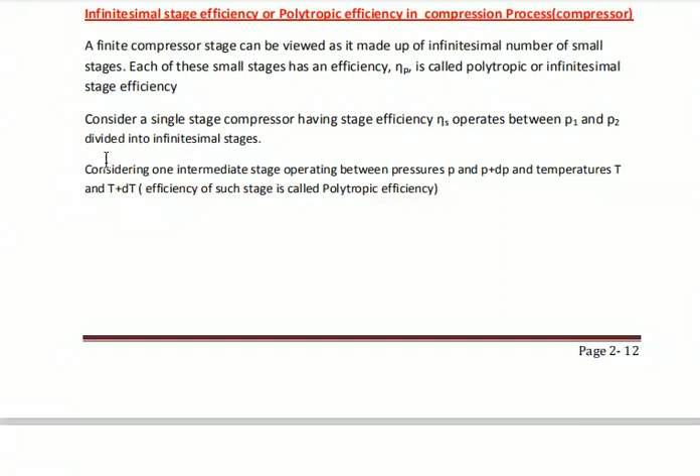So you take one single stage compressor, which can be divided into a number of small stages, which we call infinitesimal stages. That single stage compressor has pressures P1 and P2. In between P1 and P2 we divide it into small stages with pressures P and P plus dP, and temperatures T and T plus dT. This is called the polytropic efficiency.

For this we take the temperature versus entropy diagram. Here we take our single stage, 1 to 2. It is just one stage, a single stage compressor, operating between the pressures P1 and P2.

Again, this single stage compressor can be divided into a number of small infinitesimal stages. Out of those, we take one stage operating between the pressures P and P plus dP, and the temperatures T and T plus dT. This shows the compressor temperature versus entropy diagram.

First, we know that the polytropic efficiency is equal to the isentropic temperature rise divided by the actual temperature rise. So what is the isentropic temperature rise here? This dTs is the isentropic temperature rise, and from this point to this point, dT, is the actual temperature rise. That gives us the polytropic efficiency.

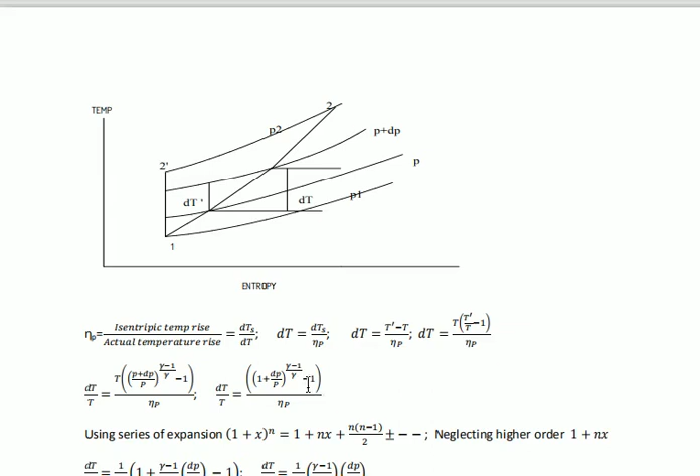So next, dT/T is equal to (1 + dp/p). p/p becomes 1; we just have to separate these two terms, p/p plus dp/p. p/p is nothing but 1, so (1 + dp/p) raised to (gamma minus 1)/gamma, minus 1, divided by eta p. For these equations we have to use the series expansion, which is used in mathematics.

Using the series expansion, (1 + x) raised to n gives us 1 plus nx plus n(n minus 1)/2 x squared and so on, and neglecting the higher orders, 1 plus nx. If you apply this series expansion to the above equation for dT/T, consider this x, so this becomes our n. Here 1 plus, and this minus 1 plus 1 will be cancelled, so directly I can write nx.

In place of n we have (gamma minus 1)/gamma. For (1 + x) raised to n, dp/p is nothing but x, and (gamma minus 1)/gamma is nothing but n. So we substitute all of them. This one and this one get cancelled, so we take n equal to (gamma minus 1)/gamma.

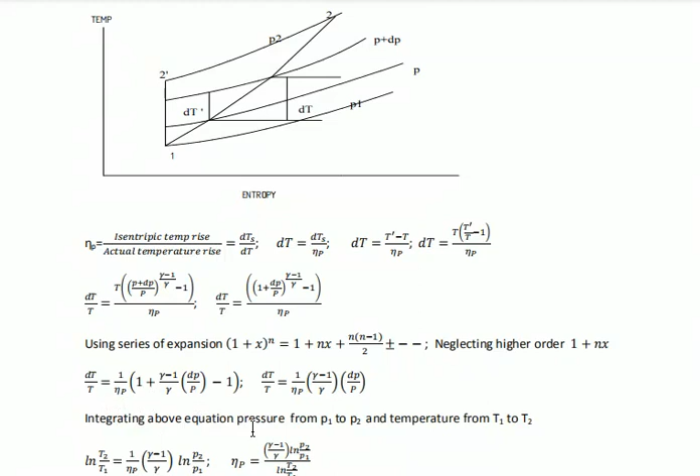Now integrating the above equation, pressure from P1 to P2 and temperature from T1 to T2. If you integrate dT/T, it becomes ln(T2/T1) is equal to 1/eta p times (gamma minus 1)/gamma ln(P2/P1). So eta p, the polytropic efficiency, can also be written as eta p equals (gamma minus 1)/gamma ln(P2/P1)...

...divided by ln(T2/T1); we just take this term to the other side. Also we can write ln(T2/T1) is equal to 1/eta p times (gamma minus 1)/gamma ln(P2/P1). So ln(T2/T1) equals ln(P2/P1) raised to the term above, that is 1/eta p times (gamma minus 1)/gamma.

The ln gets cancelled. So T2/T1 is equal to (P2/P1) raised to 1/eta p into (gamma minus 1)/gamma. This is equation number 1. Now assume the irreversible adiabatic compression process 1 to 2 as an equivalent process with an index of compression n.

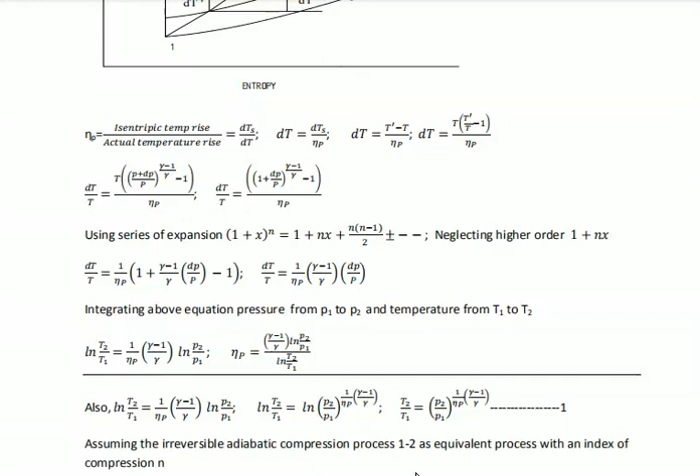Index of the compression here: if instead of this gamma you take the index of compression, that is represented with n. You just have to write that T2 by T1 is equal to P2 by P1 raised to n minus 1 by n. So this is equation number 2.

So comparing equation number 1 and 2, we got that 1 by eta p into gamma minus 1 by gamma is equal to n minus 1 by n. So T2 by T1 is there, P2 by P1 is there. Here also T2 by T1, P2 by P1 is there. We just have to compare these two indexes. We get that 1 by eta p into gamma minus 1 by gamma is equal to n minus 1 by n.

So eta p is equal to gamma minus 1 by gamma into bracket n divided by n minus 1. So hence there are two formulas to find out the polytropic efficiency for the compression process. These equations are very important to find out the polytropic efficiency of the compression. The first formula we can use is in terms of pressure and temperature.

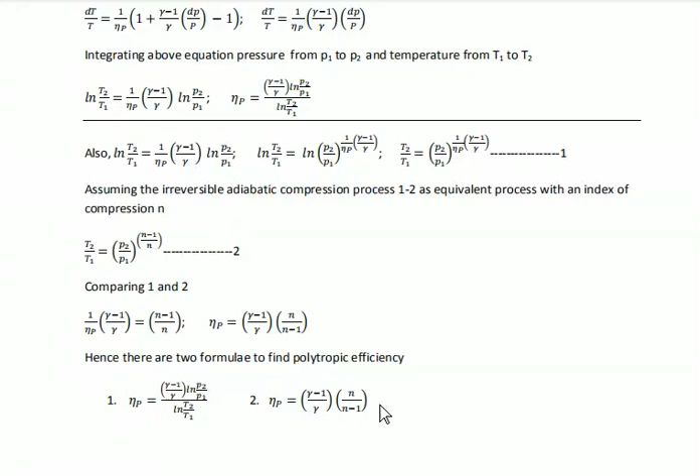So if he has not given the compression index, which is represented with n, then we have to use the pressure and temperature terms. That is given by eta p is equal to gamma minus 1 by gamma into ln of P2 by P1 divided by ln of T2 by T1. Similarly for the second, eta p is equal to gamma minus 1 by gamma into bracket n divided by n minus 1. So these two formulas are used to find out the polytropic efficiency for the compression process. Okay.

Similarly for infinitesimal stage efficiency or polytropic efficiency in the expansion process that takes place in the turbine. A finite turbine stage can be viewed as made up of an infinitesimal number of small stages. One stage of the turbine can be divided into a number of small stages. Each of these small stages has an efficiency eta p, called the polytropic or infinitesimal stage efficiency.

Next consider a single stage turbine having the stage efficiency eta s, operating between the pressures P1 and P2, divided into infinitesimal stages. So that stage is operating between the pressures P1 and P2. In between these two pressures, we have taken one small stage operating between the pressures P and P minus dP, and temperatures T and T plus dT.

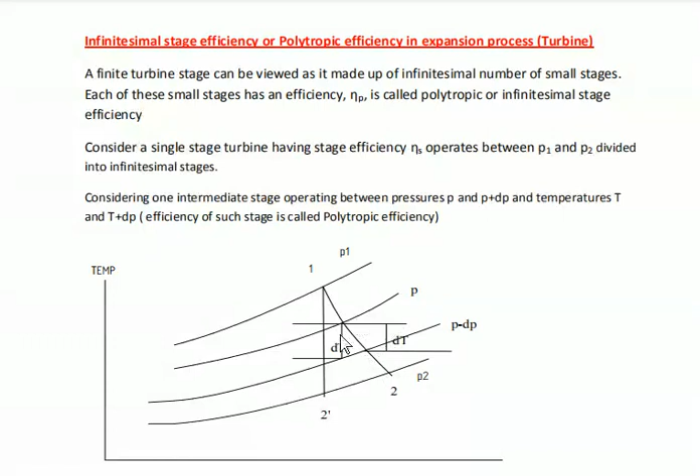So the efficiency of such a stage is called the polytropic efficiency. The stage is in between the pressures P1 and P2, and we take another small stage operating between the pressures P and P plus dP, T and T plus dT. That stage efficiency is called the polytropic efficiency. That is shown on the temperature versus entropy diagram.

So polytropic efficiency can be written as actual temperature drop divided by isentropic temperature drop, that is dT by dTs. So dT is equal to eta p into dTs. And dTs can be written as T minus Ts, the difference between the actual temperature and the isentropic temperature. So dT is equal to eta p T into, taking T outside, 1 minus Ts by T.

Taking this T to this side, it becomes dT by T is equal to eta p into 1 minus. Writing this temperature ratio in terms of the pressure ratio, we get P minus dP by P raised to gamma minus 1 by gamma, bracket complete. So dT by T is equal to eta p into 1 minus bracket P by P minus dP by P; P by P is nothing but 1, so 1 minus dP by P raised to gamma minus 1 by gamma, bracket complete. Here you just have to separate these two terms to get this term.

Again using the series expansion, (1 minus x) raised to n is equal to 1 minus nx plus n into (n minus 1) by 2 factorial into x square, minus n into (n minus 1) into (n minus 2) divided by 3 factorial. So we have to apply these equations to the above equation for dT by T.

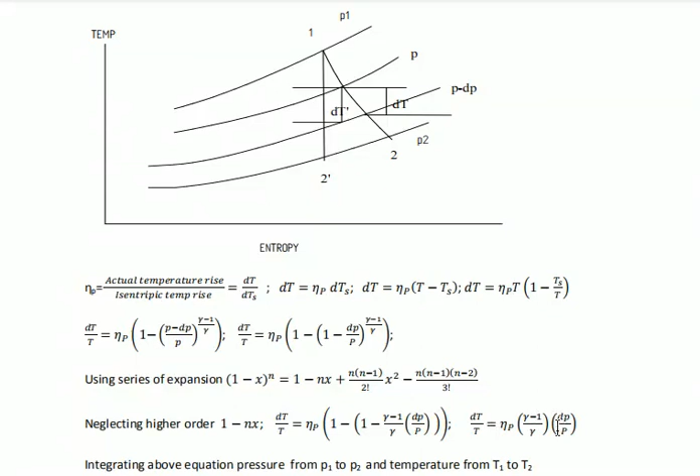This one is as it is, minus, it becomes 1 minus nx. n is nothing but gamma minus 1 by gamma, and x is nothing but dp by p. We are neglecting the higher terms. This one and this one get cancelled, so dT by T is equal to eta p into gamma minus 1 by gamma into dp by p. Just simplification steps are there in this derivation.

Again we have to integrate the above equation from pressure p1 to p2 and temperature T1 to T2. We get ln of T2 by T1 equal to eta p into gamma minus 1 by gamma into ln of p2 by p1. Next we write it in terms of eta p: shift this term to the other side, so eta p is ln T2 by T1 divided by gamma minus 1 by gamma into ln of p2 by p1. That is the polytropic efficiency.

It can also be written as ln of T2 by T1 equal to eta p into gamma minus 1 by gamma into ln of p2 by p1, or ln of T2 by T1 equal to ln of (p2 by p1) raised to eta p into gamma minus 1 by gamma, writing it in terms of indices. The ln gets cancelled, so T2 by T1 is equal to (p2 by p1) raised to eta p into gamma minus 1 by gamma. This is equation number 1.

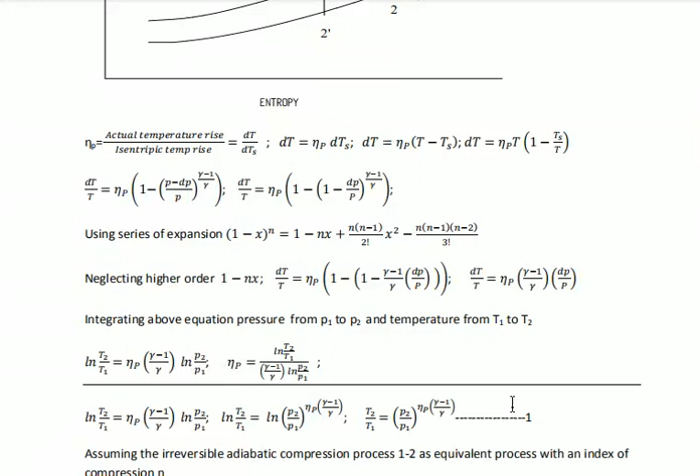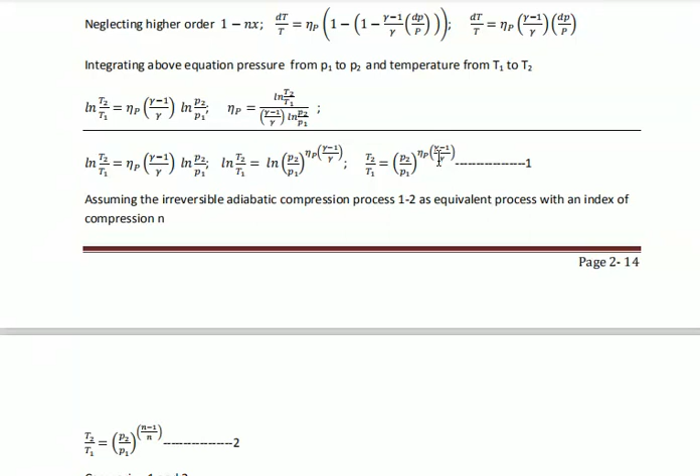Next, assume the irreversible adiabatic compression process 1 to 2 as an equivalent compression process with an index of compression n. Instead of gamma, we write n here. Then T2 by T1 is equal to (P2 by P1) raised to n minus 1 by n. Comparing the indices of 1 and 2, eta p into gamma minus 1 by gamma equals n minus 1 by n. So eta p is equal to gamma divided by gamma minus 1 into n minus 1 by n. This is another formula for the polytropic efficiency.

So we can use two formulas to find the polytropic efficiency for the compressor. Eta p is equal to ln of T2 by T1 divided by gamma minus 1 by gamma into ln of P2 by P1. If the temperature and pressure limits are given, we use this formula. If not, we use the other formula, gamma by gamma minus 1 into (n minus 1 by n). These two formulas are used to find the polytropic efficiency of the compressor.